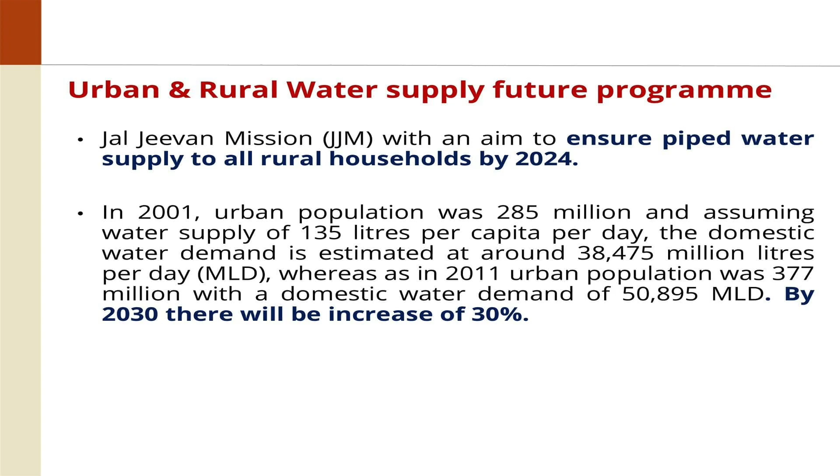Whether it's international, national, state, or cities level, public health exclusively contains water supply and sanitation. It's a reversible process. When you construct STPs, these are the existing STPs with all these problems. When you design a new system, you will have all these issues to be taken care of.

In this, mainly we are going to focus on today's session: selection of technology, land acquisition, resource recovery, and sludge management, which I marked here in the webinar series.

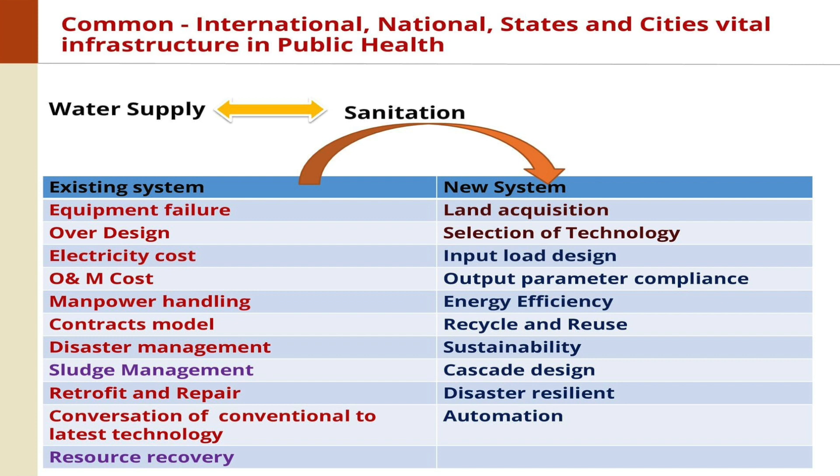That is important. Now I invite session 1, selection of technology, by Mr. G. Kondala Rao. He is actually Chief Engineer, retired, Public Health, Government of Andhra Pradesh, with more than 50 years of experience in water supply and sanitation, from erection to commissioning, as well as on the treatment part. He is a World Bank expert, and he's also on the committee for formulation of the FSM policy. So I now request Mr. G. Kondala Rao to handle this, and you can tell us, sir, to go to the slides next, so we will operate it.

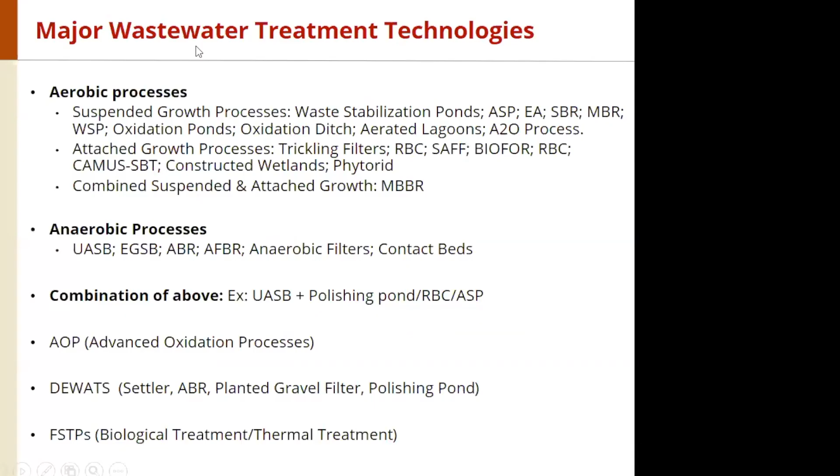Namaskar to all of you. There are certain processes in wastewater treatment, like aerobic processes, anaerobic processes, a combination of those two, and decentralized wastewater treatment plants, FSTPs, like that.

Under aerobic processes, we'll get suspended growth processes, under which we'll get waste stabilization ponds, the activated sludge process, extended aeration process, and sequential batch reactor, and oxidation ponds, oxidation ditches, aerated lagoons, and the A2O process, and attached growth processes.

Under attached growth process, we get trickling filters, rotating biological contactor, and submerged aerobic fixed film processes, and the BIOFOR process. Under the combined things, we get the MBBR process, the moving bed biofilm reactor, like things.

Under anaerobic processes, the UASB, that is the upflow anaerobic sludge blanket reactor, the expanded granular sludge blanket reactor, and the anaerobic baffled reactor, anaerobic fluidized bed reactor, anaerobic filters, and contact beds.

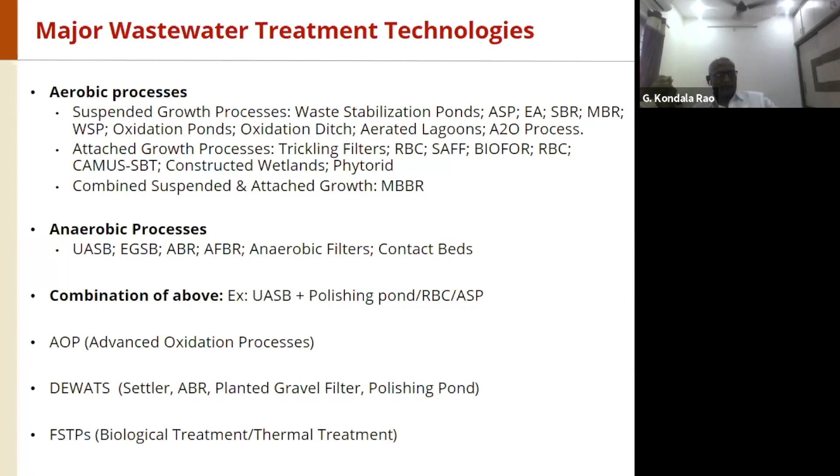So, what are the factors affecting technology selection? That's the topic for us now.

Under the technical head, we get the wastewater composition and characteristics. What is the composition of the wastewater? Is it only municipal sewage, or even industrial wastewater, or agricultural waste also coming in, or any other waste like canneries waste, etc.

And the characteristics, what is the BOD, COD, etc., suspended solids, and microbial load, etc. And the plant capacity, what is the plant capacity? It also leads to decisions on technology selection, and what are the unit processes involved, or what is necessary for achieving the effluent discharge parameters.

The treatment performance expected, and the efficiency and reliability of the treatment, and also the various components involved. The flexibility in the load and the fluctuations in the load.

They also will determine selection of the technology, the extent of sludge production, end use to which the effluent is put, and relevant standards. So what is the end use to which you will put the effluent? Is it only for agricultural use, or gardening, or any reuse or recycling to a thermal power plant like what Nagpur is doing. That also will decide the technology selection.

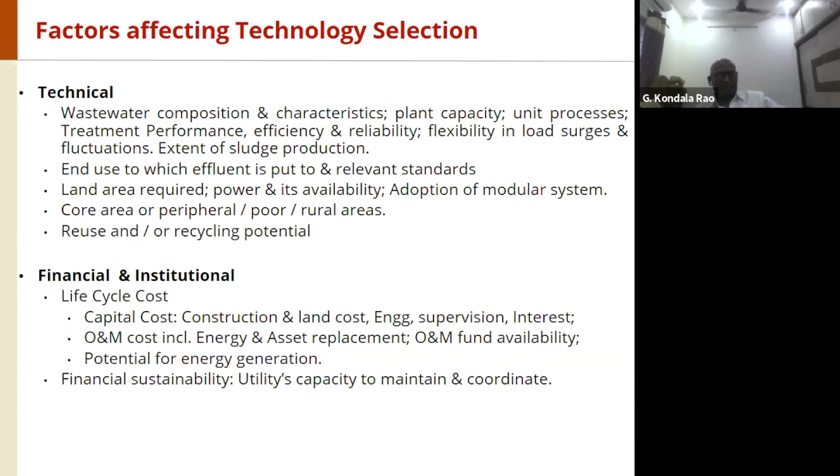Next, please. Under operation and maintenance, we get the ease of operation and maintenance - how easily we can operate and maintain the plant. Need for skilled manpower - does it require skilled workers? Does it require high capacity, high technology like SCADA or other technologies, or any artificial intelligence?

And energy needs - what are the energy needs for the plant to properly operate as per the design requirements? And failure management - how can you manage it during failures or disasters? Is it amenable? Do you have any systems available? And capacity utilization - what is your capacity to utilize, what is your capacity utilization of the plant? Are you able to run it to full capacity, or is it underutilized? Depending on that, the energy usage, operational parameters, and discharge parameters will be based.

Operating and control technology, equipment and spares, and their indigenous availability also will decide the type of technology and components required. Because in one of the actual waste biomethanation plants, there was a bio engine which was to be imported from Germany, whereas that has become obsolete or defunct. That's why they could not obtain it, and that has resulted in non-revival of the plant. So this is one of the examples.

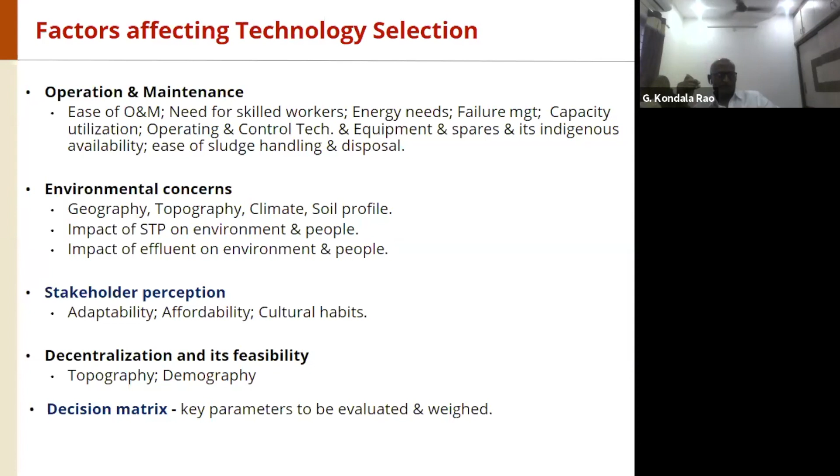Next, please. DEWATS, that is decentralized wastewater treatment plants, can be utilized in peripheral areas, small communities, local bodies. These are of low maintenance, low energy requirements, etc. Similarly, FSTPs in peripheral areas or at cluster level, or rural areas, under fecal sludge management. We can have a combination of technologies also, depending on the geography and demography.

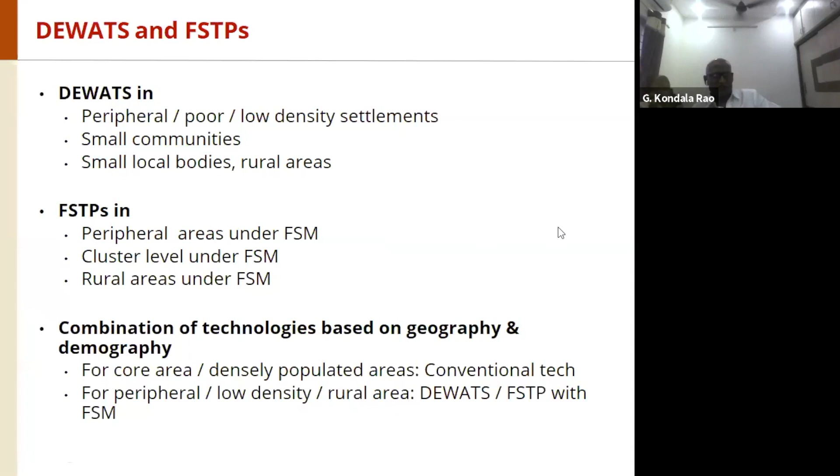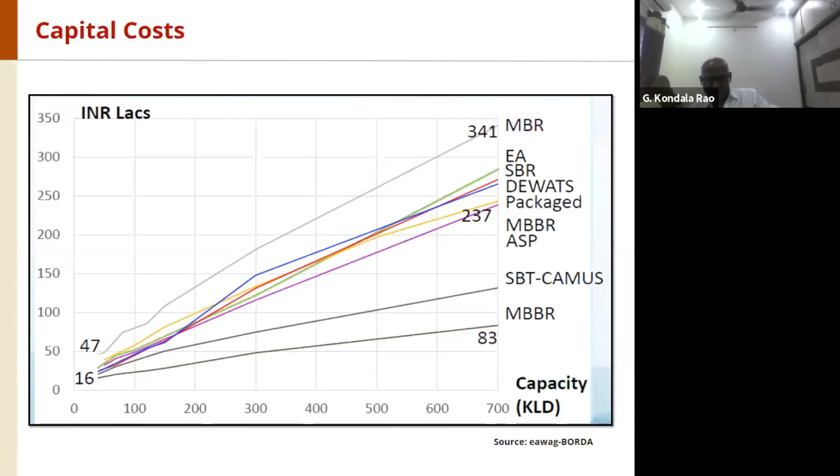Next, please. In a similar way, regarding the operation and maintenance costs also, we have got SBT, compact SBT, and DEWATS at the lowest end, that is the lowest cost, whereas MBR is the highest. The remaining are at the middle level.

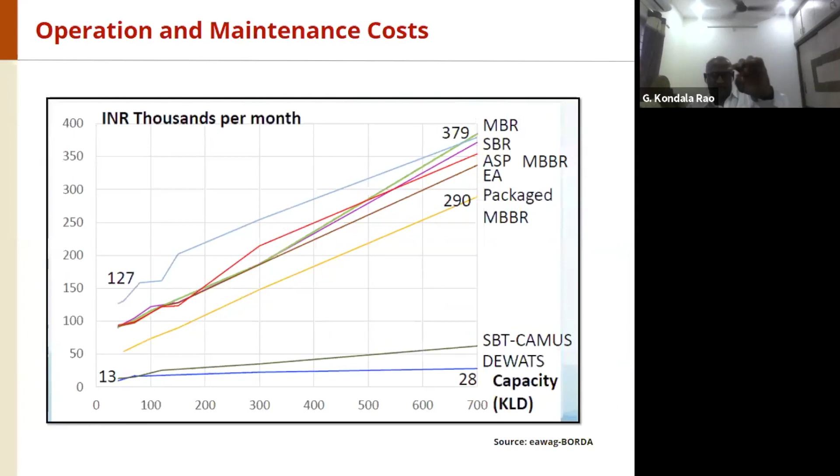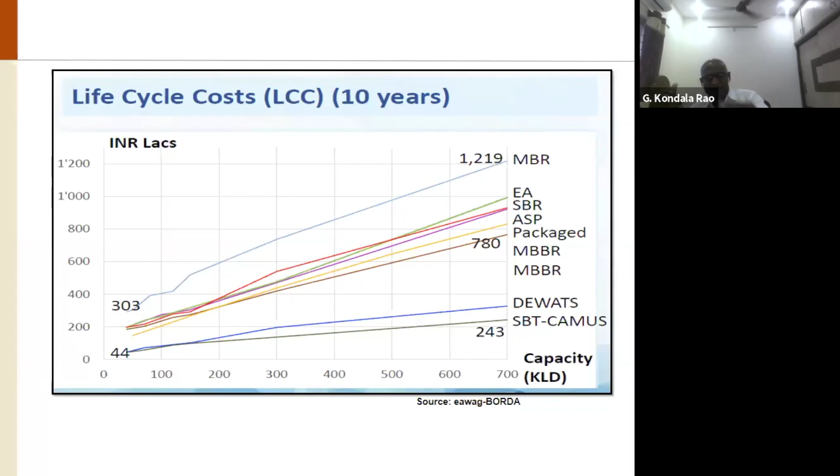Next, please. Life cycle cost - that is what counts for us. So the life cycle cost is the lowest for DEWATS, that is decentralized wastewater treatment systems, and SBT, soil biotechnology, and highest for MBR, that is the membrane bioreactor, and a little lower for extended aeration, SBR, etc.

Next, please. So when you see the cost to the consumer, what is the cost per connection he has to pay per month? For MBR, it is the highest, whereas for ASP or SBR, etc., they are a little bit lower. For SBT and DEWATS, it is the lowest. So from this, you can make out some conclusions.

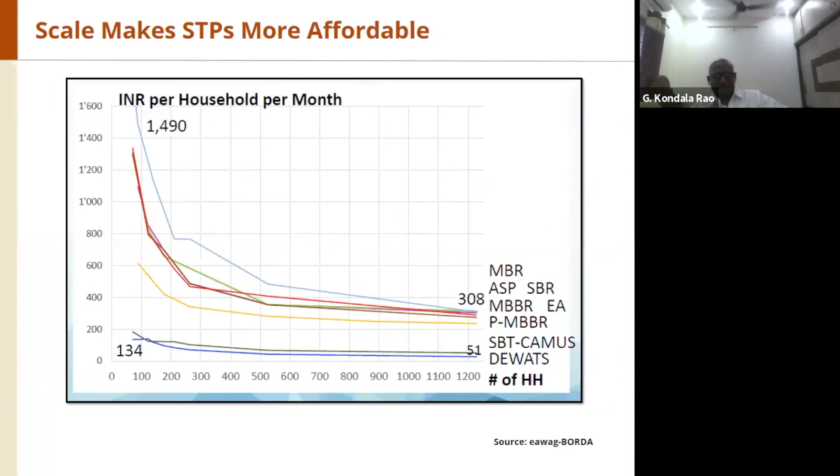Next, please. So the IITs, 7 IITs, have conducted a study, an evaluation study on the STPs under the Ganga Action Plan, and they have come out with certain conclusions. They have given a graph of it.

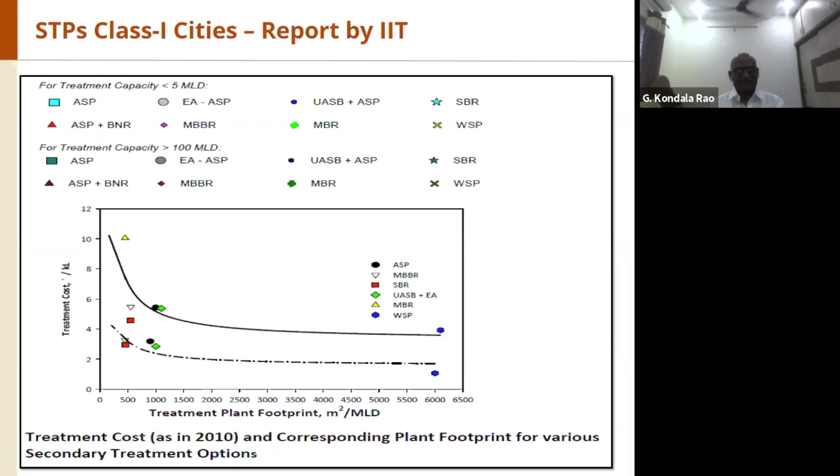Next, please. So they have done a lot of experiments, evaluation. This is the final outcome of the technology options they have given in the Ganga Action Plan review. So performance we have to see in terms of quality of treated sewage, and the performance, what is the reliability of performance?

That is, what is the consistency of the output parameters, the effluent parameters, and the impact of the effluent discharge on the people, on the environment, on the land, on the groundwater, on the aquatic animals, etc. And the potential for economically viable resource mobilization, resource generation, like you can use the sludge for manure or soil conditioner, and you can use the biogas as fuel or electricity.

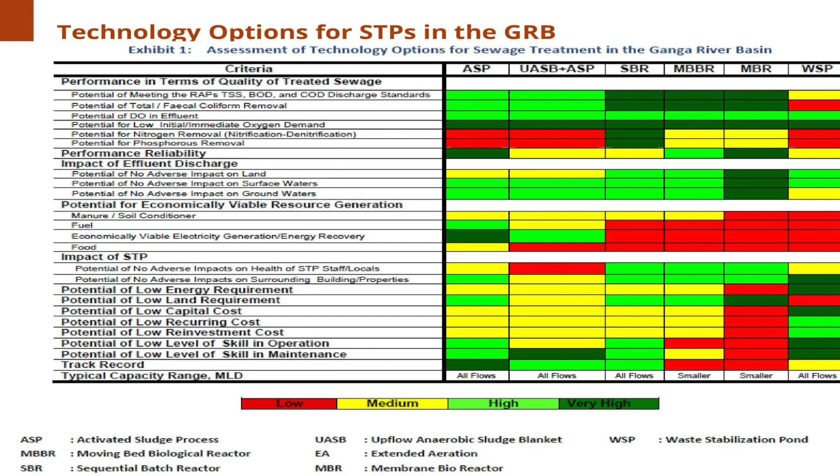You can economically use the electricity for energy generation, and you can use this manure for food crops or non-food crops. Similarly, we have to assess the impact of the STP on the adverse side - what are the adverse impacts on the health of the people, staff, etc., on the surrounding people, and the potential for low energy requirement, low land requirement, low capital cost, low recurring cost, low reinvestment cost, that is the asset replacement, etc., and low level of skill in operation and maintenance, and the track record.

What is the track record of the particular technology? For example, if you are selecting some SBT or SBR, etc., what is its track record across the country or the world, particularly in our country? Typical capacity range - what is the typical capacity range of this particular technology? For example, in SBT, so far they have been able to construct up to about 3 MLD or 5 MLD. So under the Amrut project of Government of India, we have suggested up to 5 MLD - we have proposed SBT technology, particularly in smaller municipalities like our peripheral areas. Like that, you can take a decision.

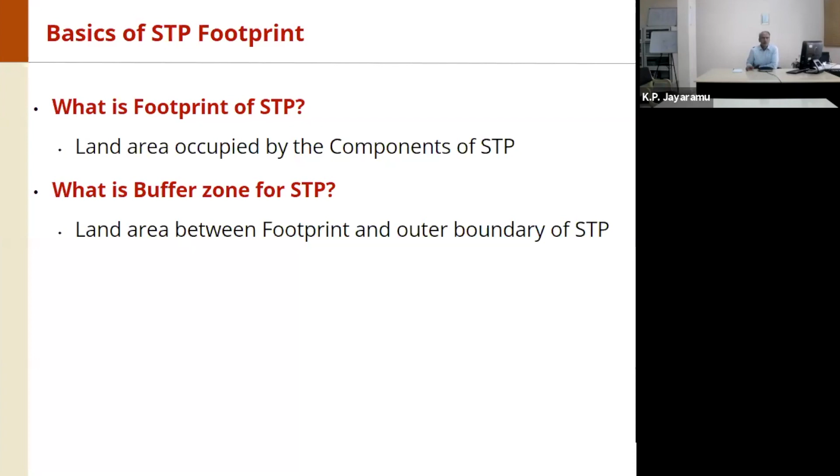Footprint - it's very simple. It's the total land area occupied by the components of the STP and the buffer zone. So the land area between the footprint area and the outer boundary of your land - that's the simple definition. So how do we fix the footprint?

Selection of technology - as mentioned earlier, SBR, advanced technologies take minimum footprint. Apart from that, we should be able to arrange all the components properly, including orientation of each component, so that it takes minimum footprint. That is very important - we should not haphazardly put the components. If we do that carefully, we can save another 10 to 15% area. And we should be able to reserve some space for future expansion of the plant.

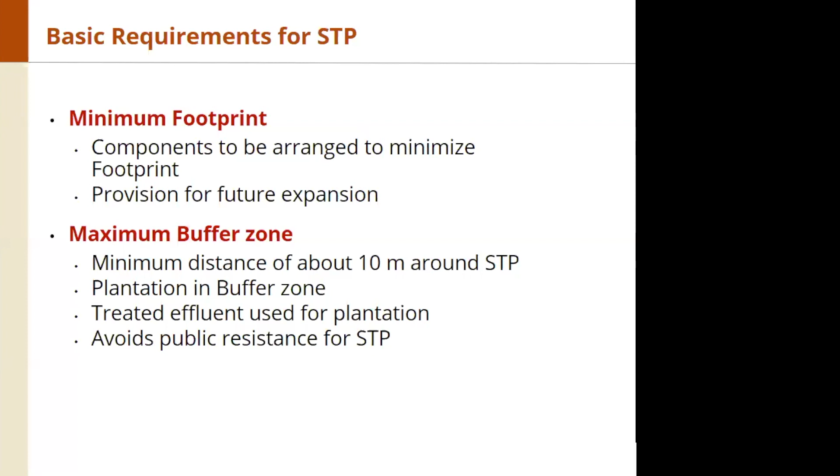The second point is that you have to maximize the buffer zone - minimize the footprint and maximize the buffer zone. Generally we put 10 meters so that the adjoining people, houses, or schools should not feel there is an STP there. So 10 meters, or more than that, with plantation of flowering plants or fruit yielding trees, so that you can attract birds. Also, the treated effluent can be used for the plantations.

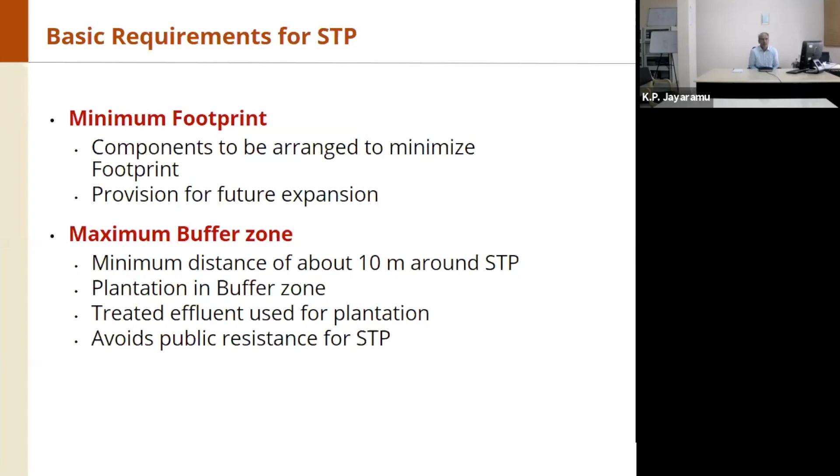By doing all these things, there will be minimum public resistance. We can convince the public that we are doing all this, spending more money on this, so definitely people will agree. We made some experiments like this and were able to convince the public - we are putting more money on land, maybe 2 times the required amount, and we can utilize that effluent effectively in raising plants. We can also put some fruit yielding trees or revenue yielding trees so that it will help the local body also. Next one.

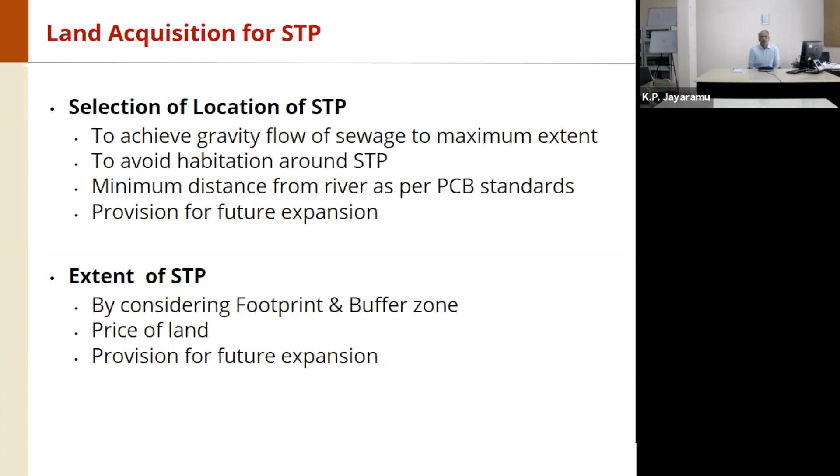Based on those factors, we need to determine the footprint required and also the buffer zone required, so we have to find the extent of land. Before that, selection of location of STP: we have to select the STP site such that it's at the end of the valley, to achieve maximum gravity flow. Nowadays a lot of pumping stations are coming up, so we have to avoid those pumps. If we achieve minimum pumping and maximum gravity flow, the cost of maintenance will be reduced. We also need to avoid habitation around the STP, or have more buffer, with minimum distance from the river, maybe around 500 meters as per PCB standards. We also have to make provision for future expansion. So the extent of STP, as I already told you, is determined by the actual footprint, buffer zone, and future expansion.

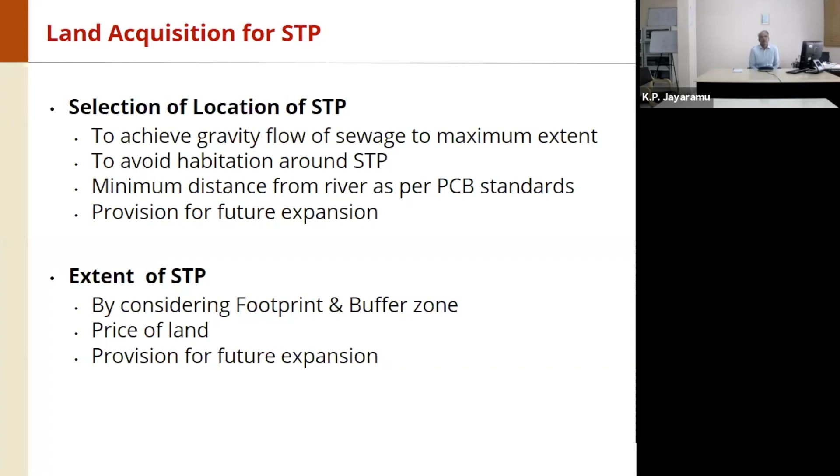Next, there are some case studies. Some components are already done and some we are planning now, having designed them.

This one is near, in between Mysore and Bangalore, in Maddur town. The capacity of the STP is about 5 MLD. You can see the footprint is 20,000 square meters. Actually, it is an earlier plant, an aerated lagoon. Now we are utilizing this plant to enhance the capacity, so we are just planning this now. The buffer zone is around 12,000 square meters. Fortunately, this plant is surrounded by wetlands, so there is no habitation there.

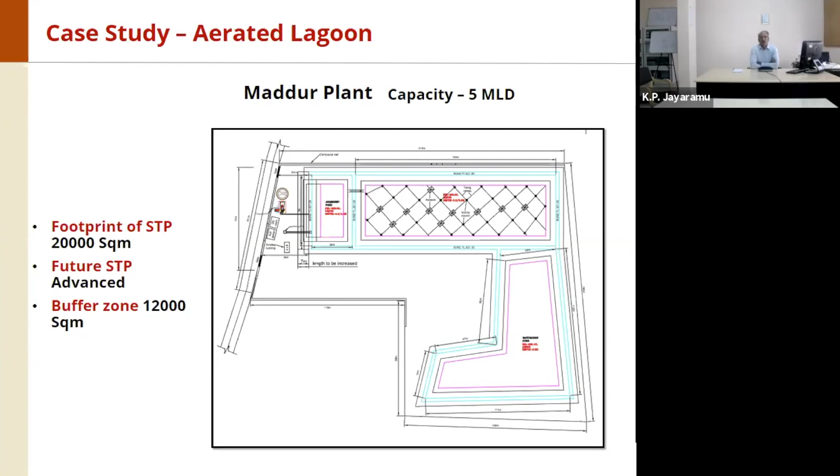This is the Mysore plant, one of 4 plants, the Kesare plant. It is just on the outskirts. The footprint is large because it's an old aerated lagoon, about 1 lakh square meters, and the buffer zone is about 30,000 square meters. We cannot reserve for future expansion here because we have to go for advanced technology in the coming years.

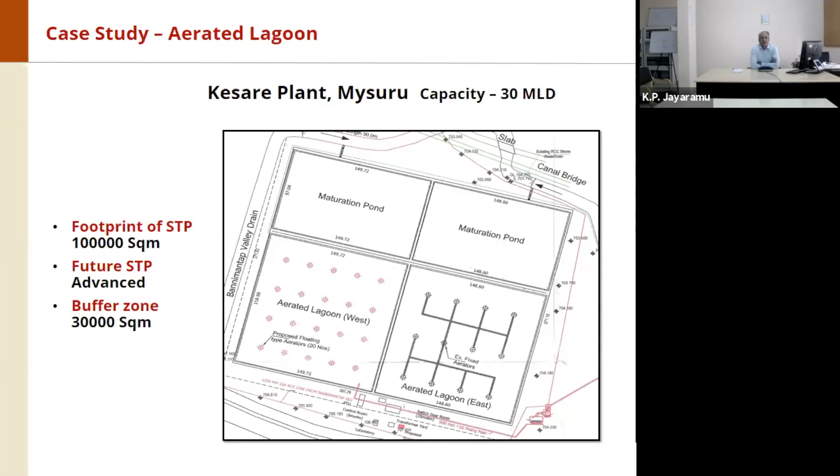This is MM Hills. We are now constructing this plant. It is a temple town, a small town, MM Hills. We are going for SBR technology. The footprint is minimum, about 3,000 square meters, and we have reserved another 3,000 for future expansion. The buffer zone available is about 2,000 square meters. This is also not surrounded by habitation; it is on the outskirts of the town.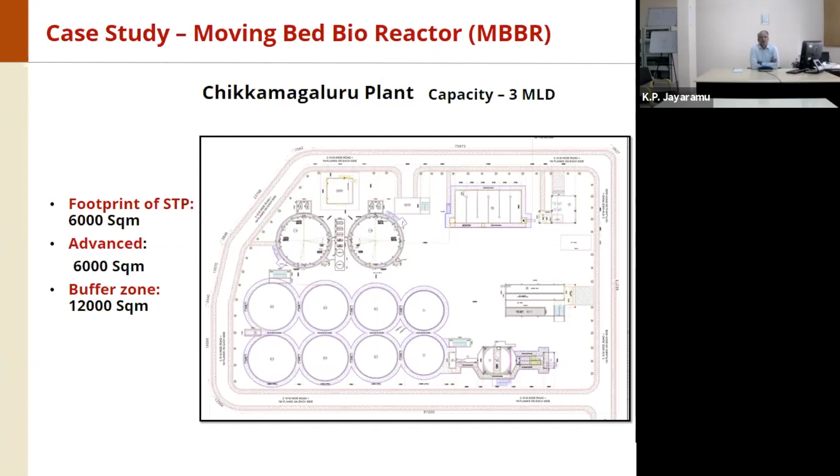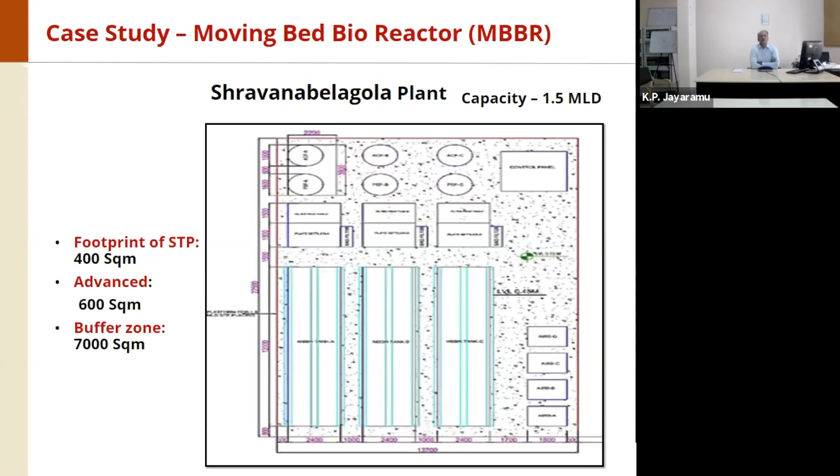Thank you, sir. It was a very good presentation on land acquisition as well as the footprint, how it has been used from the various MLDs. You told the slides are very less and 10 minutes is enough, but land is an important thing which we cannot acquire - it's in the rural areas too, it's going up. So I feel that in Q&A, if answers can be given from the participants, we can go for the next presentation on the important thing, sludge management.

Most people agree with me that when we are visiting the STPs, the sludge will be a problem actually. We can see the wastewater getting treated, but sludge disposal is one of the important aspects. And the recovery also plays a main role in the sludge aspect. Normally they say dry it up, give it to the field for the farmers, but I don't know how they check the FCO standards and everything.

With us, we have a speaker talking on sewage sludge management, an expert, a man of fecal sludge management. He has constructed so many FSTPs. When India thought about FSTP, I invite Mr. Arun Kumar, presently a research scholar, but he's worked in a lot of positions in different placements all over the country, and he was at the University of KwaZulu-Natal, Durban, South Africa. He's going to handle the sludge management topic. Over to Arun.

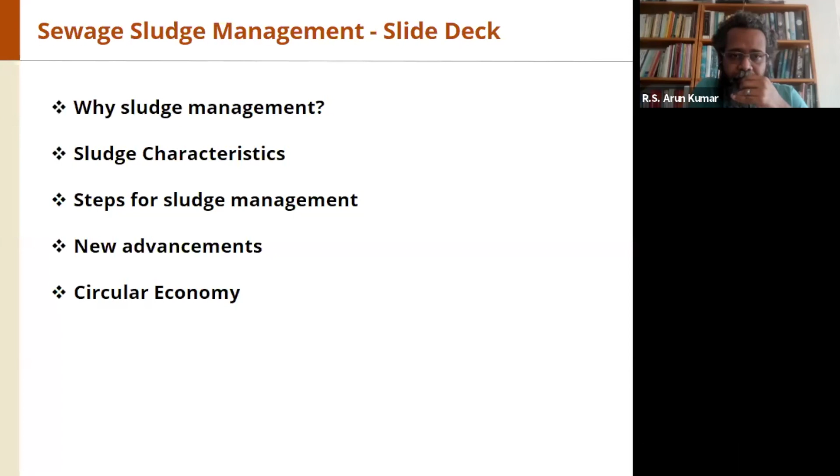So why do we need to manage sludge? As I said, we look at sludge as a resource. There's a lot of nutrient value in the sludge - we have nitrogen, phosphorus, potassium, and a lot of micronutrients like zinc, potash present in the sludge. This is a very important angle, especially from the phosphorus perspective. Phosphorus is a mined product, and the resources and reserves of phosphorus across the world are going down. So the more we reuse and recycle sludge as manure into agriculture, the better it is.

Definitely from that perspective, sludge is of great value. Sludge has got a high calorific value, almost up to 30,000 kilojoules per kg on a dry basis. This is another critical aspect of sludge, where you can have energy recovery. There's a lot of carbon, a lot of volatile organic carbon in sludge, which you will see in the subsequent slide.

But then the challenge, of course, is you just cannot take the sludge directly and use it. If it was that easy, I wouldn't be speaking here. So sludge has got its own nature of being a biohazard. If disposed of or not managed properly, it can cause a lot of problems. The more severe problems of sludge would be in the aspect of its biohazardous nature, as well as heavy metals. Smaller STPs generally don't have too much of an issue with heavy metals, but as STPs become bigger and larger, heavy metals become a big concern. You have all kinds of microorganisms which are pathogenic, as well as protozoans and other organisms which are a challenge to really manage.

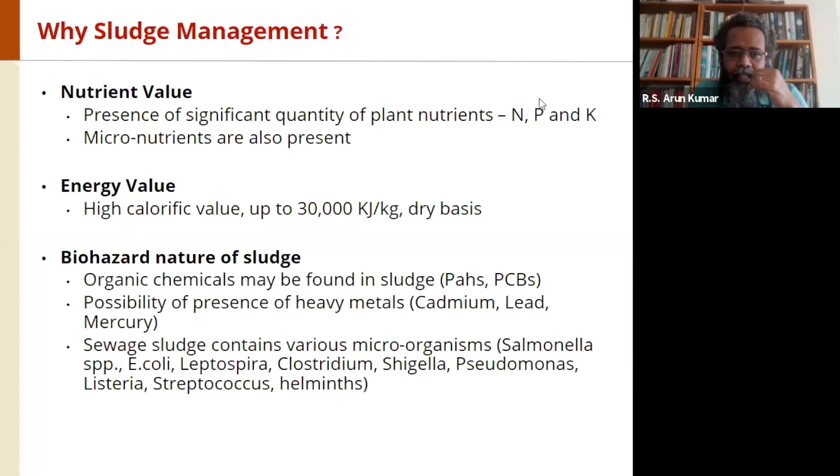Next slide, please. And now, in the context of COVID-19 - very interesting times. I've been following the wastewater treatment sector for the last 4-5 months, and no other time was wastewater treatment so very important than this time, when everybody was locked down in their homes consuming water completely. So the STPs, I suppose, were all fully loaded with the load they are designed for.

But more critical is the virus itself. This type of virus, the RNA virus, has generally two aspects of critical concern. One aspect is that this virus can stay for up to about 2 days in temperatures of about 20-25 degrees Celsius.

So that's a critical aspect, which means that the virus is active in the wastewater as it reaches the STPs, and also as it gets treated in the STPs, the virus is still active until the disinfectant stage, of course.

The other important characteristic of this type of virus is its hydrophobicity, meaning it has a high tendency to adhere to the solids part rather than the liquid. This means once we have dewatered or taken the sludge out, the chances of having the virus in the sludge are greater than in the water.

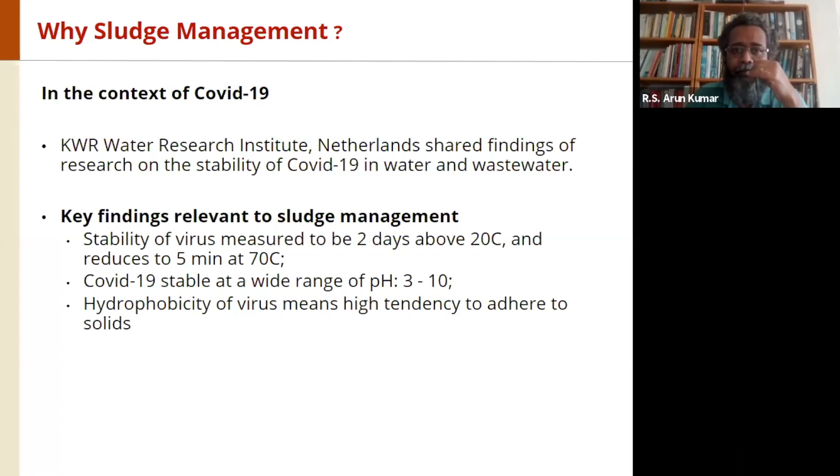Otherwise, most of the parameters are similar, except in strength. The BOD of sewage is say 200 milligrams per liter, while sludge would be about 25,000 to 30,000 milligrams per liter. So the scale is different, but the characteristics are similar.

The important factor, again, is total solids. You have somewhere between 0.5% from secondary sludge in an activated sludge process to as high as 7% from primary sludge. So this is the range of solids we get. And the energy content also varies somewhere as low as 18,000 to as high as 30,000 kilojoules per kg.

This is the most important aspect when we are looking at designing different systems for management of sludge. These will drive your decisions, along with the factor of how you want to actually reuse the sludge and recover the most out of it.

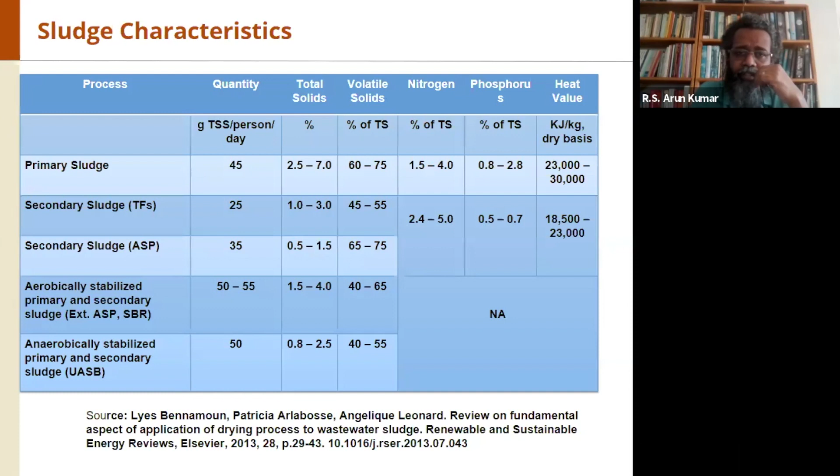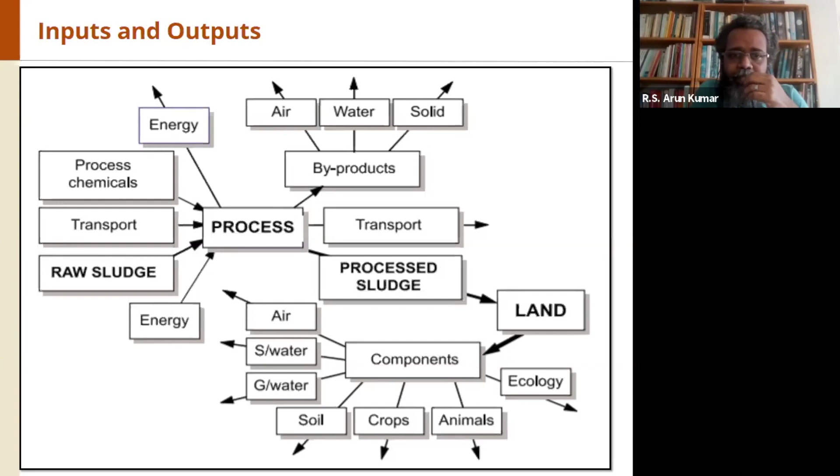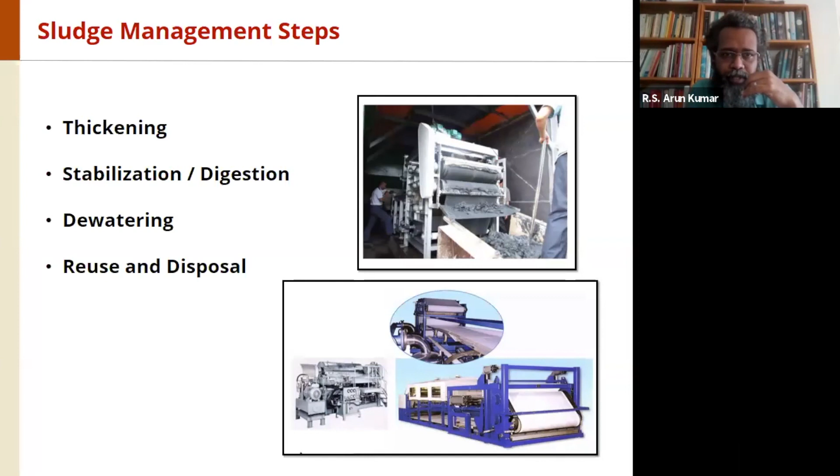So for sludge thickening itself, most STPs usually have a settler, which is one of the most cost-effective, low-energy ways to achieve thickening of the sludge.

But besides gravity thickening, you can also take up centrifuge thickening, as well as air flotation thickening, which are more efficient in terms of increasing solids content. For instance, a gravity thickener would give you a concentration of up to about 10%, but a centrifuge would give total solids up to about 20-25%. Air flotation technology gives up to about 15%. So based on how efficiently I want to manage my sludge in the preliminary stage, different approaches can be adopted.

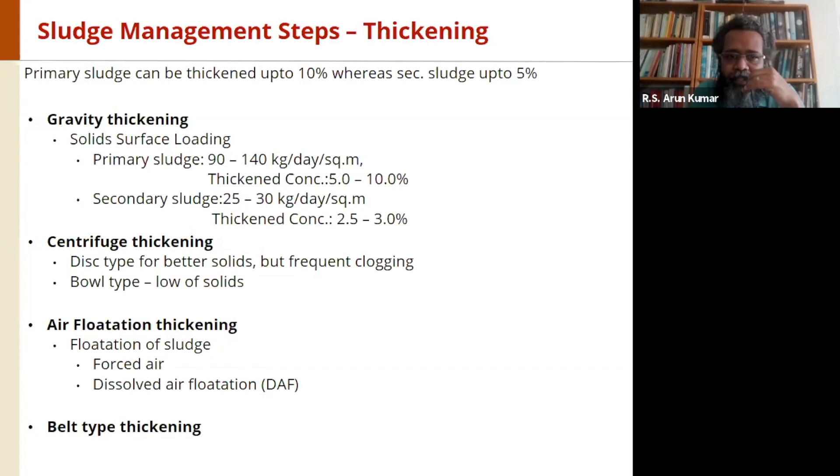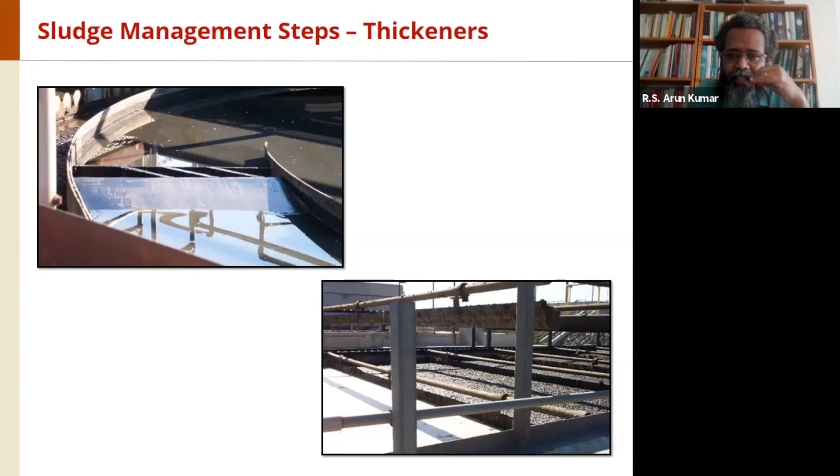These are some photographs of different thickeners. You have the general gravity settler, which looks more like a sedimentation tank. And then you have the air flotation system, different types of air flotation system, including dissolved air flotation, which is actually far more effective in terms of getting the sludge together out of the system.

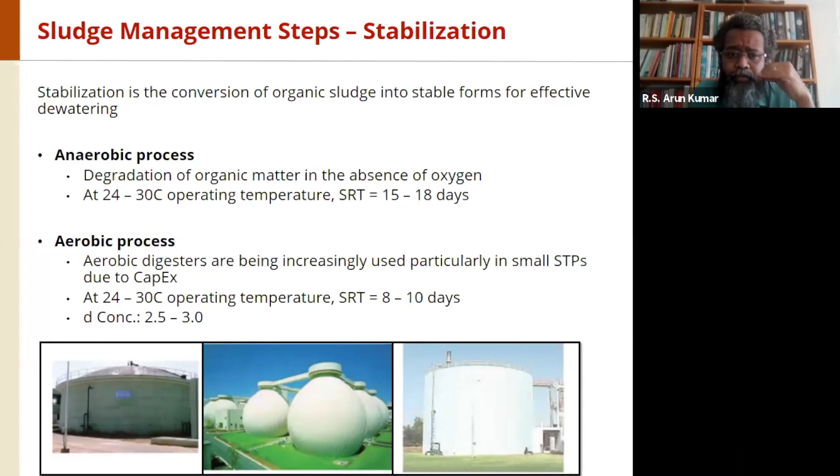So post thickening, you need to stabilize the sludge. This is one of the most important steps because the sludge at that stage could be relatively unstable in terms of its own characteristics. Giving it a good retention time, either aerobically or anaerobically, can make this sludge stable. Most STPs adopt an anaerobic process for stabilization. The great advantage is that you get energy out of the system, which almost makes the entire process self-sustaining in terms of energy load. But of course, smaller systems, going back to the footprint logic, use low footprint aerobic systems.

Post this, we have the dewatering stage. Basically, dewatering means solid-liquid separation. So here we try to achieve total solids up to about 25% to 35%.

Most of the processes involved in this are mechanical in nature, either a belt press, a filter press, a screw press, or the volute press, which is quite extensively used now. Smaller STPs generally prefer filter press, though most of them are not operated. I think it's high time we get them operational, simply because of the value it brings.

Some of the steps involved in dewatering are: you need to chemically condition the thickened sludge, which means addition of a polymer, which will coagulate and flocculate the sludge particles. Then post that, we have application of mechanical energy, which forces the water out. We can go very deep into this because sludge has the concept of unbound water, bound water, and water between the molecules. There's a lot of science here, but I'll restrict to the major steps.

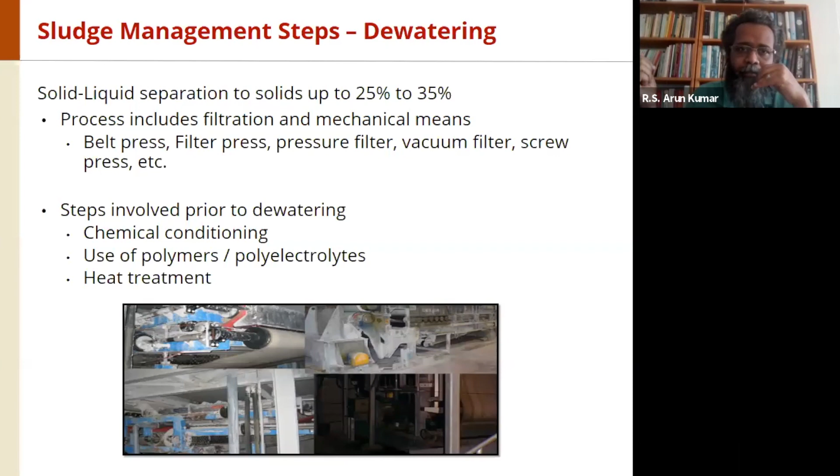Post dewatering, we could see how we can utilize the sludge in different options. Some of the equipment used in dewatering include centrifuge and filter press.

As I said, the reuse depends on what we want to do. For instance, if we want a Class A biosolid out of the system, completely pathogen-free, then the sludge has to be treated with a disinfectant. The best disinfectant for sludge as of today is to treat it thermally, which takes care of both the pathogens and the elements, depending on what temperatures we achieve.

That's one of the reuse aspects. As you can see from the different modes of reuse, agriculture really takes up about 45%, whereas the energy component is also about 27%. So there's quite a significant movement now across different STPs to really utilize sludge as a resource, and not throw it out or do open dumping or disposal into the sea.

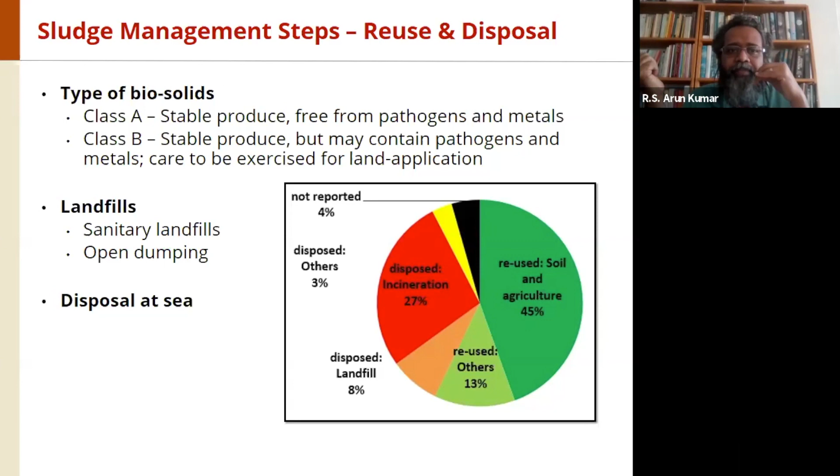These are some other new advancements: you can go for thermal drying, pelletize the sludge, and use it as fuel for different applications. You can use it in an incinerator or a gasification plant to generate electricity. In cold countries, you also generate heat as a resource, or convert that heat into electricity, and also generate biochar, which is a phenomenally good soil conditioner, especially with fixed solids of about 25-30%.

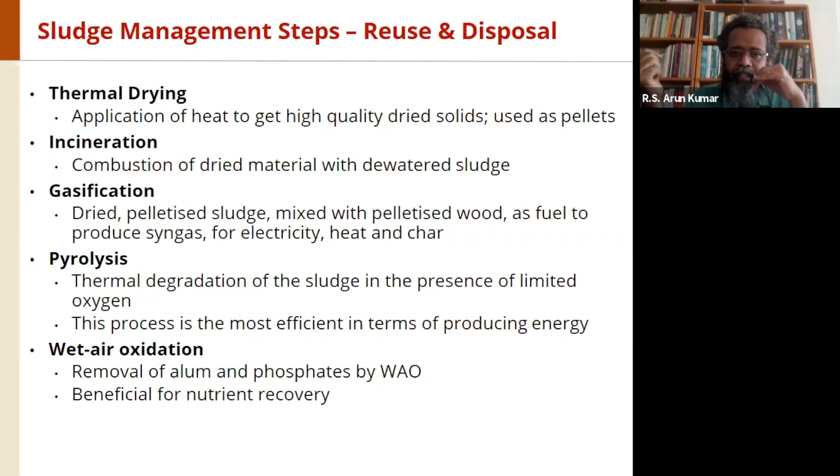Its application is very good for holding nutrients to itself; the absorption is phenomenally good. Pyrolysis is another technology looking at energy generation in the presence of limited oxygen, and wet air oxidation is another upcoming technology, specifically looking at how we can recover phosphates out of the system.

A small insight into circular economy. As you would have seen in the last few slides, I've been stressing on how the sludge can be reused and recovered for its own value, the nutrients and the energy it carries. From the phosphorus perspective, this becomes very important, that we can bring it back into a circular economy logic: recover energy, recover phosphorus, recover the entire agriculture system itself, and in the broader, longer run, address the food security aspects of it.

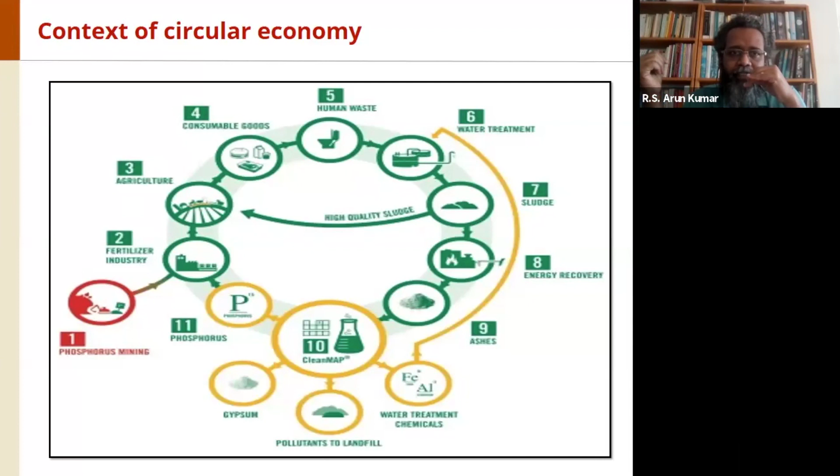I think with this, I come to the end of my presentation. Thank you.

Thank you, Arun. Next, we have a session, the final session, by Mr. M.N. Thippeswamy. He is retired as Chief Engineer, Bangalore Water Supply and Sewerage Board, and has a lot of experience. Now he's an advisor and consultant to many organizations. He's the one man, I have seen in his CV, who brought a lot of funding to Bangalore, from Australia, UK, and JICA - it was called something different at that time, Overseas Economic Cooperation Fund. He brought the first funding for the Cauvery projects and everything. So there's a lot to learn from him. He will be discussing where it's possible to recover resources, resource recovery and untapped resources, which will also connect with this. And he's the first person to conduct an energy audit in complete water supply systems in Karnataka, we can say.

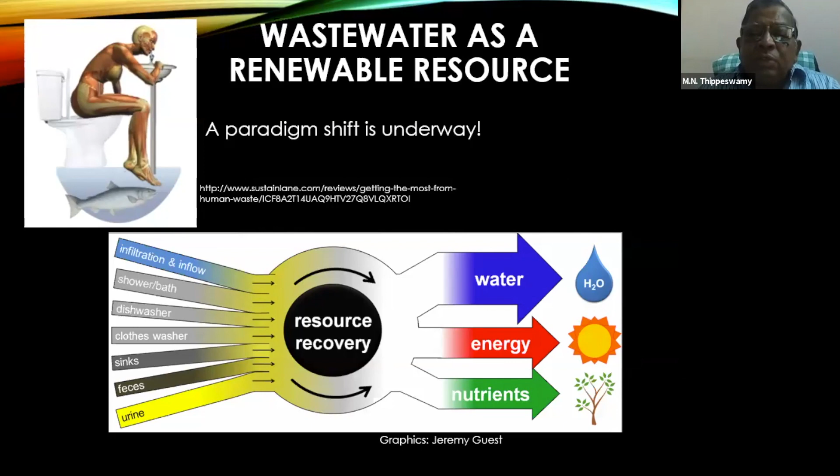So we have to see, in order to make it a circular economy, as my previous speaker said, we should move from a linear economy into a circular economy, whereby the utilities can certainly sustain. So this is exactly what I'd like to introduce to you.

Water reuse is economically feasible and attractive when there is a potential for cost recovery by treating wastewater to a water quality standard acceptable to users. We have different types of users: users for agriculture, users for industry, users for non-potable purposes in various urban activities, and lastly even for potable usage.

I will deal with this water in more depth. At present, the possibility of nutrient and energy recovery are among the most advanced in terms of technical and financial feasibility, so we have to really look at it.

In the first presentation on selection of sewage treatment plant, the most important component was energy. In conventional sewage treatment plants, as opposed to low-cost treatment plants, energy is going to be a very critical factor, and the quantum of energy required for each process really has to be looked into.

In the present Indian context, we don't have the required quantity of energy, and even if it is available, the cost is increasing every year because of non-availability of energy. The costs are increasing at 10% every year, and that is going to be one of the very important factors.

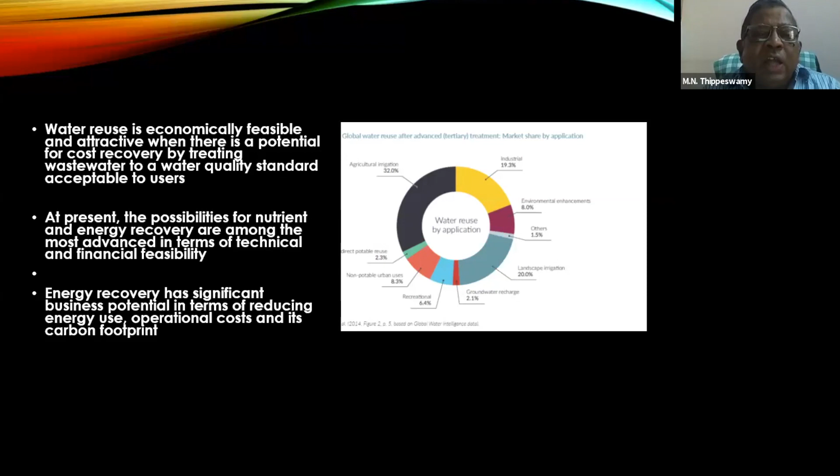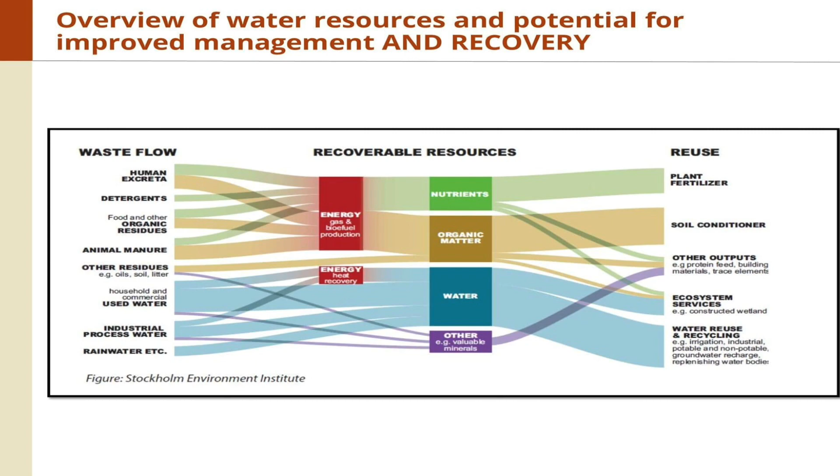Water, I think this is the most important. These are the three important components I said. I think we should really look at not only building wastewater treatment plants, but we have to incorporate in all these sewage treatment plants a recovery of these important components.

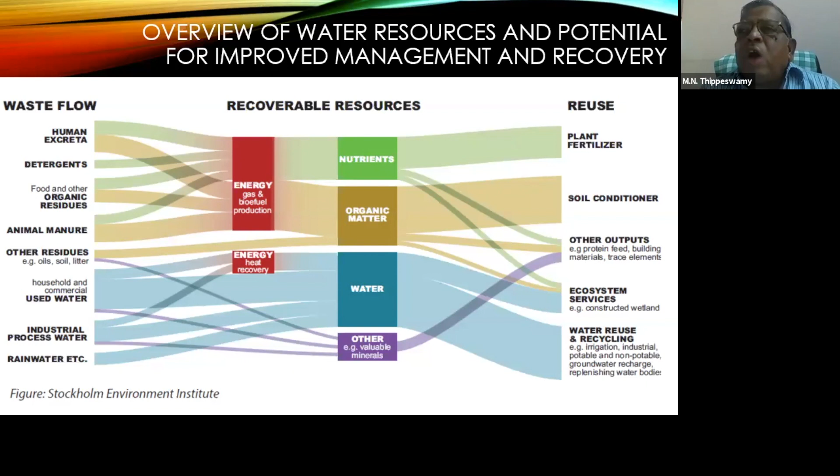So let me start with these four R's: reducing, removing, reusing, and recovering. These are the four important components in wastewater. And these are all because wastewater is a valuable resource.

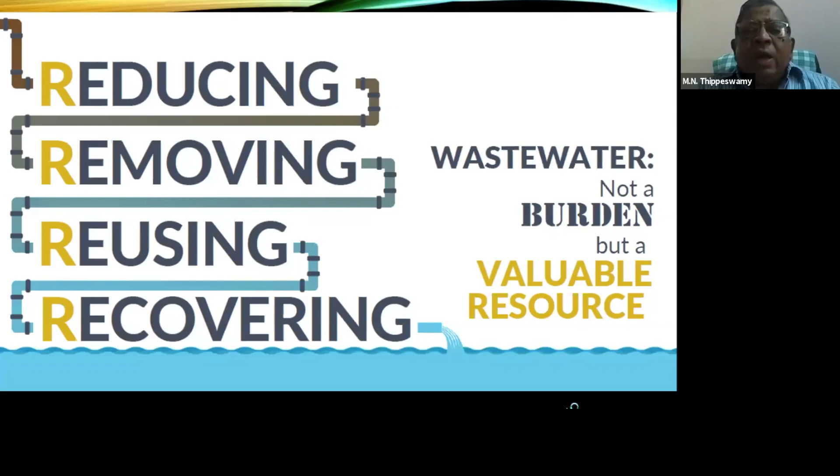So in continuation, what I'm trying to say is the prevention or reduction of pollution at the source in terms of the wastewater produced. So what we have to do is reduce even the generation of wastewater, reduce your usage of water in residential houses or other industries, etc. That is one part. And also regulate the contaminants in that.

See what is happening in Bangalore and Hyderabad and other places. Froth is coming in a big way. In a year, almost 8 to 9 times, big froth is coming and people are suffering because of that, and it is creating a lot of nuisance. This is because of newly added chemicals into the sewage.

So the second important thing is removal of contaminants in wastewater streams. In operational systems, collection and treatment processes remove various constituents of wastewater so that it can be safely used or returned to the environment.

And these are several types and levels of wastewater treatment. We have various types of treatment which Mr. Pandal Rao has already spoken about. This is actually removal of contaminants with different types of technologies available. But at the same time, when you do that, you should also recover these byproducts.

The use of wastewater, that is reuse of wastewater. I think every part of the world is speaking on wastewater use. Safe use of treated or untreated wastewater under controlled conditions for beneficial purposes, historically used primarily in irrigation. Of course, irrigation is one major usage over a period of centuries, but at the same time now this can be utilized even for potable purposes.

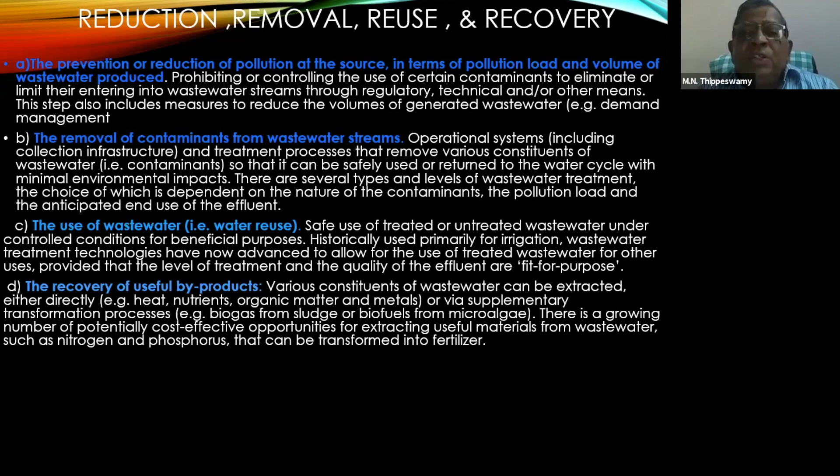What I'm trying to talk to you about in this short presentation is recovery of energy and nutrients. This starts with reducing and prevention of pollution - minimization of wastewater flow should be given priority, along with traditional reuse of treatment wherever possible.

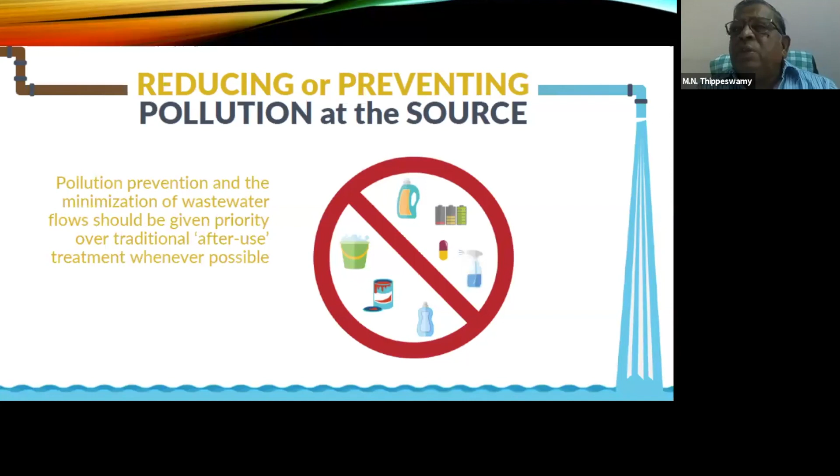Second is removing pollutants. As I said, collection is most important because we have to keep the network very healthy so that no wastewater flows outside. So the entire network should be kept in operation, maintenance of the network should be there, and the wastewater generated should reach the treatment plant.

We have natural flow, natural treatment. Earlier, as I said, we had wetland treatment, conventional stabilization ponds, aeration plants, oxidation ditches, etc. These are all conventional, low-cost treatments.

Now we have highly treated, very high quality treatment - conventional treatment plants starting with trickling filters, activated sludge process, sequence batch reactor, etc., which were all shown by Mr. Pandal Rao. I think we should really look at how best we should treat this wastewater to meet the required standards, especially if we are to recover this water for non-potable purposes or industrial requirements - to that extent it should be done.

So as I said, centralized versus decentralized.

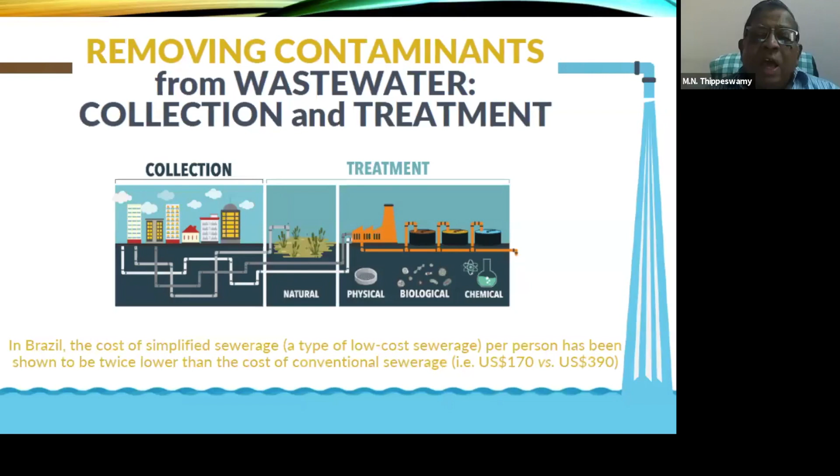If you go back 2 or 3 decades, we were all looking for centralized treatment plants, taking treatment away from outside into huge treatment plants. Today, around the world, big cities have 2,500 to 5,000 MLD sewage treatment plants. I recently visited Blue Plains in Washington, which is 2,400 MLD.

These are centralized plants, whereas decentralized plants are small plants. Bangalore itself has 2,300 such plants, basically working for institutions, educational institutions, commercial institutions, and also huge housing complexes. So these are all the various alternatives.

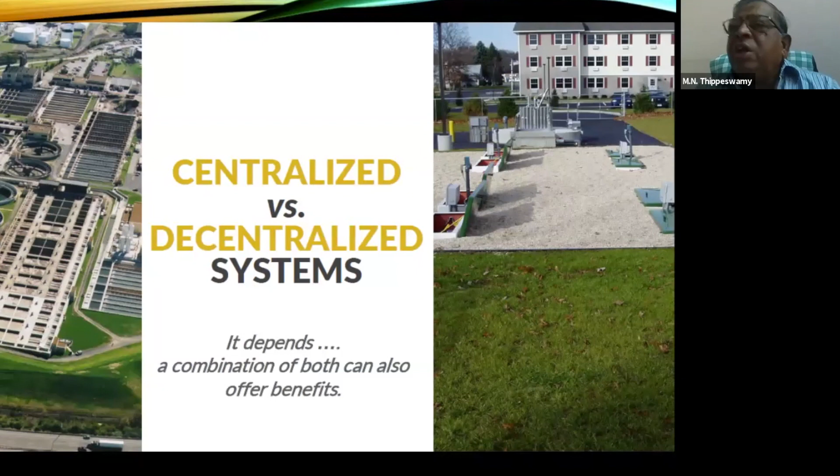I want to specify that wastewater is very much required for power generation, whether coal power or any type of power generation except renewable energy like solar. For other energy production requirements like cooling water, this water is very much required in huge quantities.

Similarly, agriculture use. For example, in Bangalore, wastewater of now 400 million liters plus is supplied to Kolar for agriculture reuse, feeding several lakes around Kolar. One more project is ongoing, that is Chikaballapur. These are two major projects supplying to agriculture.

Perhaps you are aware, Israel is one of the best countries in the world, using almost 85% of wastewater for their agriculture, and they are planning to go up to 90% by 2030. This is a very important area for our country too, because we use a lot of water for agriculture. If we can supplement this with wastewater, that would be something.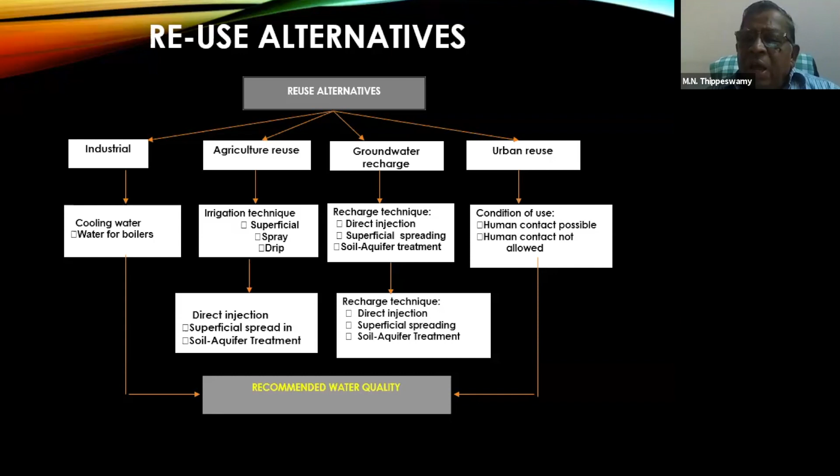One is that almost 40% of wastewater is now reused for drinking purposes in Singapore, and there's a 232 MLD Western Corridor project happening in Australia. Apart from that, there are a lot of other urban usages for non-potable purposes.

Coming back, recovering useful byproducts is another use - methane. As Arun Kumar already mentioned, methane is one of the very important factors. Almost 65% of the gas generated from anaerobic digestion is methane, which can be fed in after removing other gases, and we can directly inject into a gas engine and generate power. Many countries, almost 100 plants in the USA and many plants all around the world, are energy neutral.

They are not taking even 1 unit of energy from the grid, running their own generation of energy. There are plants which generate energy and feed it back into the grid, making money. I'll give you some examples for that also.

Second important thing is recovery of phosphorus, which is a fertilizer, a very important nutrient that can be used as fertilizer. Phosphorus is a chemical element not widely available, found only in 5 or 6 countries like Morocco, Australia, USA. It is told that the phosphorus mineral won't be available after a few decades, and that is a stress. In that context, recovery of phosphorus from wastewater plays a very important role.

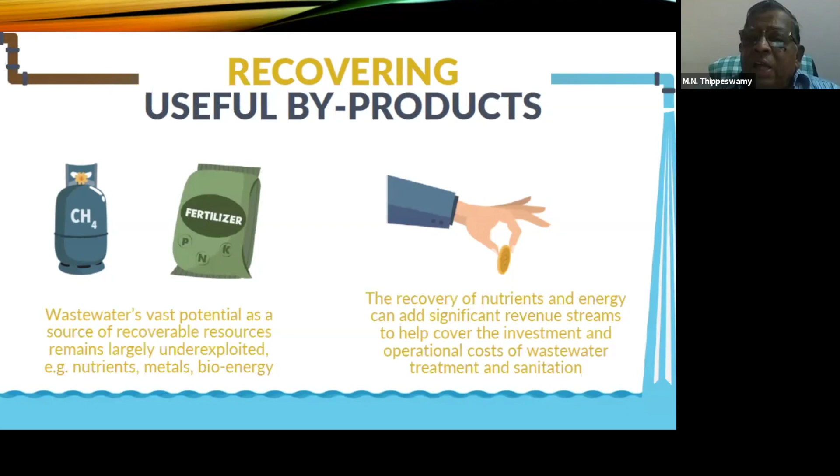Ultimately, the biosolids can be made use of as a fertilizer. I'll give an example here - in Accra, Ghana, they are using it for agriculture usage, etc.

As I told you, a lot of work has been done in Kolar. You can go through the website—Kolar, about 1 year back, commissioned this and they are also growing a lot of different types of vegetables, etc. This is exactly what recovery of wastewater for recovery purposes looks like.

This is wastewater recovery for potable use, and the planned indirect potable use—this is exactly what is being done in Singapore. This is the first country to showcase this.

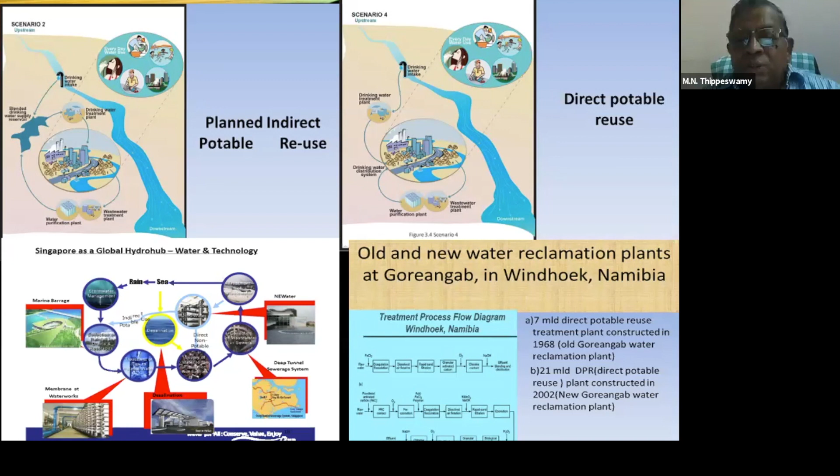Now 40% of wastewater is used, and they are planning to go up to 50% by 2060, with a complete agreement between Malaysia. So 50% is that, and the other 50% is from stormwater and desalination, since the other is direct potable use.

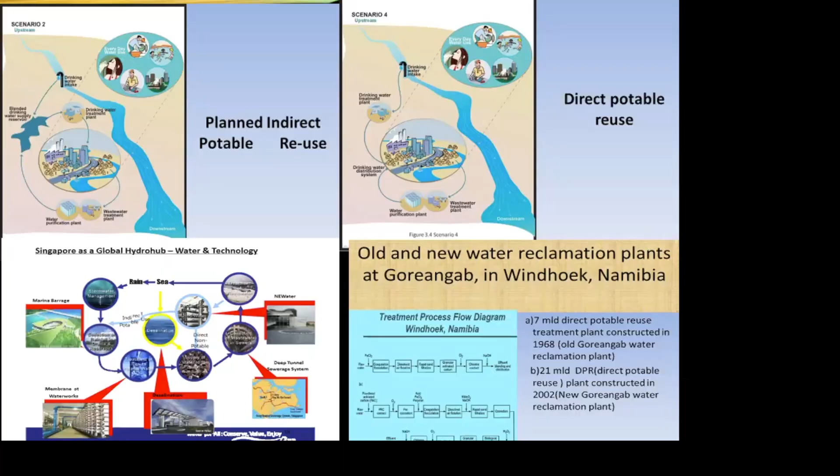One minute to go. Okay, this is recycled water—see, people in Singapore are using recycled water for manufacturing beer.

So this shows the different types of biogas that are available, how we can use biogas, what are the impacts of that, and how it is helping with climate change, etc.

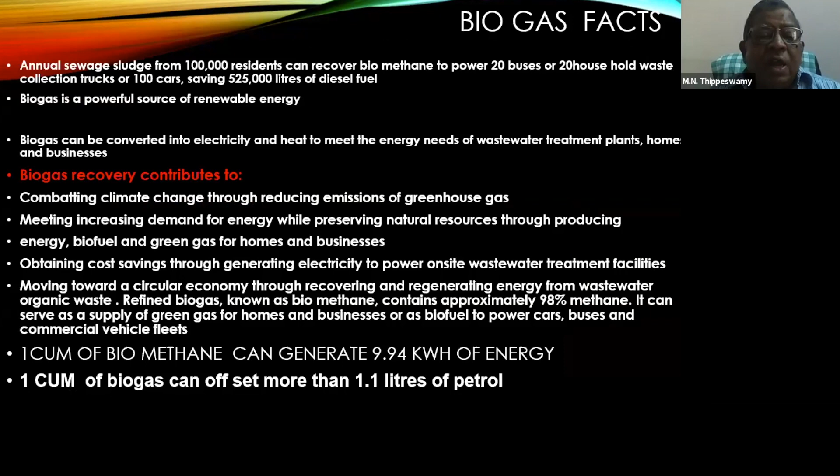These are examples of energy-neutral recovery projects: the Vienna project, Denmark, Oakland in California, etc. These are all beyond zero—energy neutral, as I mentioned.

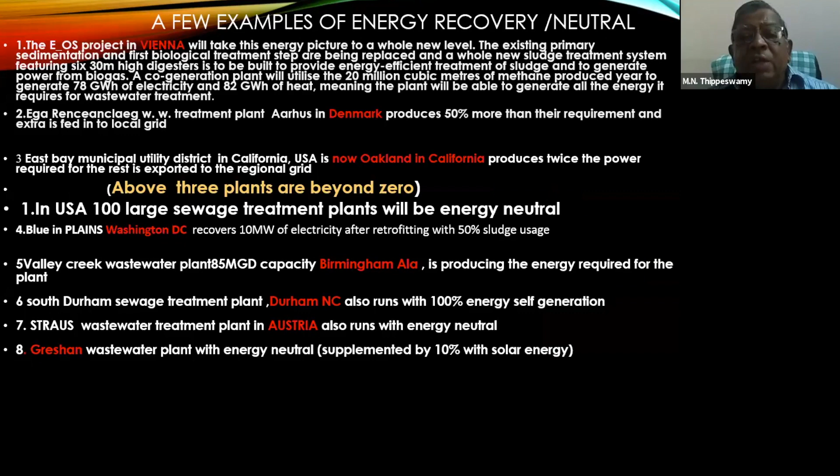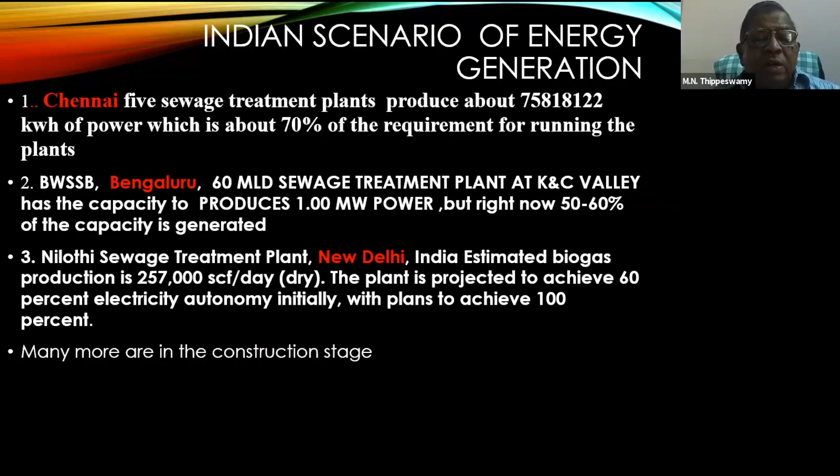These are foreign countries, and these are all from Chennai, Bangalore, New Delhi, which are also generating power—up to 70% in Chennai. Bangalore is generating 1 megawatt of power, where almost 60% is generated. In Delhi, it's 60%, etc.

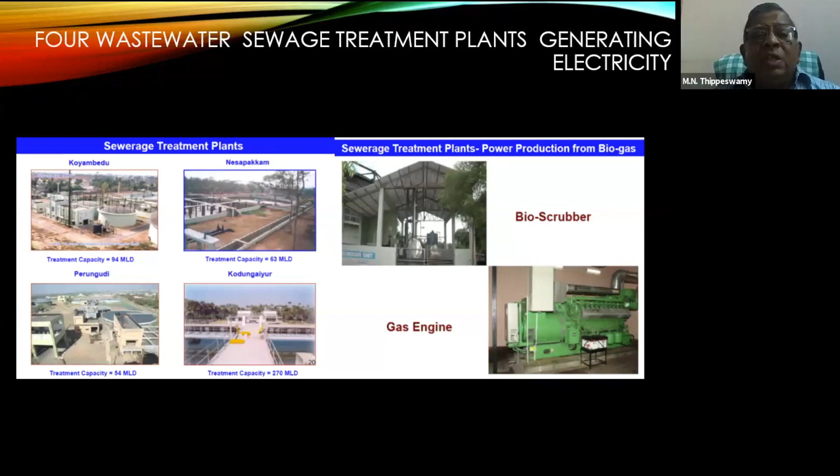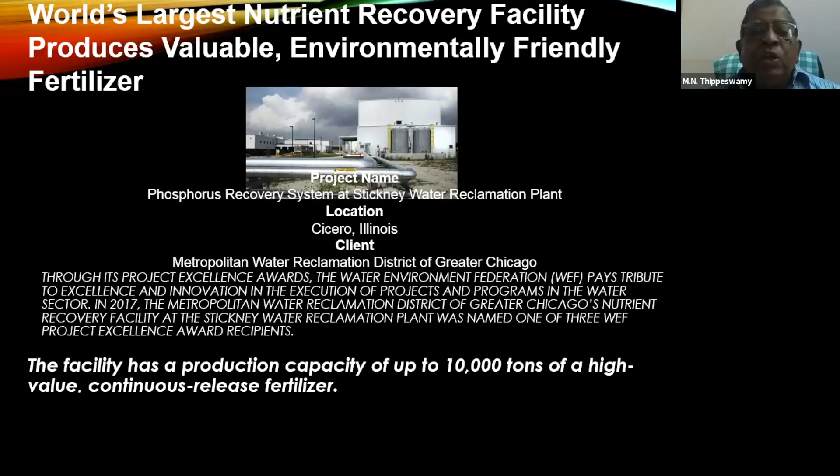And this is Illinois—I think this is the Stickney wastewater reclamation plant where they are producing phosphorus. It's a very huge project near Chicago. This phosphorus is recovered from the wastewater, and you can see how the Chicago Stickney wastewater treatment plant is producing this. This is not a burden; it's a valuable resource.

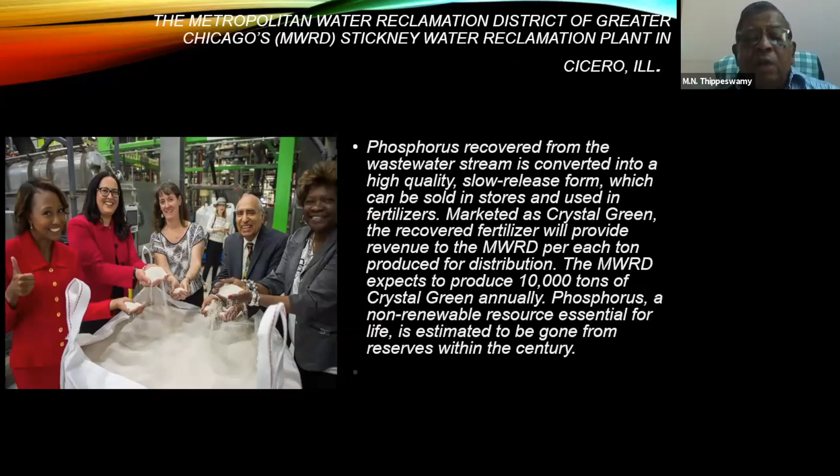Thank you. I think there is a lot more to be discussed—this minimally requires more than 1 hour 30 minutes to explain each one of them. But definitely, this recovery of resources is most important in the present context, in the 21st century—without which, water, energy, and nutrients cannot be sustained.

If we can't do that, I think the planners and institutions should seriously think about this. Whenever they want to go in for a plan, they should seriously look at these areas before they approve their plan. Otherwise they should not take it up—that should be there, otherwise we are making people suffer.